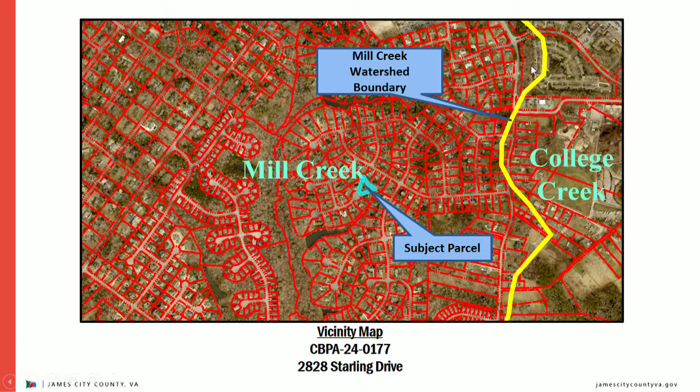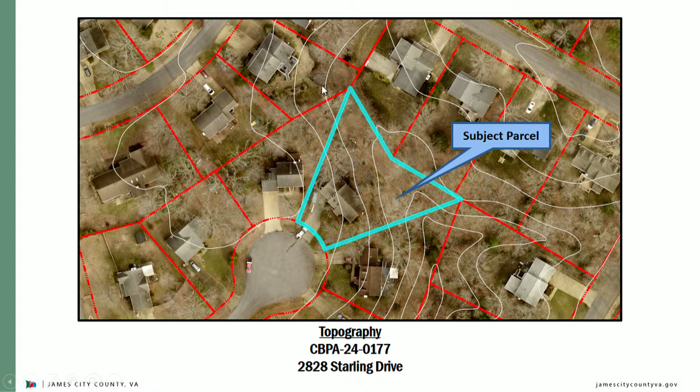Subject parcel and the Mill Creek watershed boundary. A closer look at the subject parcel and aerial view. Topography. RPA boundary.

The total lot size of this property is 0.41 acres, of which 44% is located within the RPA. The applicants are proposing to replace, expand, and convert the existing deck at the rear of the home to a screen porch. Total impacts to the RPA associated with this proposal equate to 128 square feet of increased impervious.

Required mitigation for this amount of impervious impacts equals half a planting unit. The applicants have provided a mitigation plan equaling half a planting unit, 1 understory tree, and 6 shrubs, therefore satisfying county mitigation requirements.

So in this section, you can see the existing deck, and they are expanding it here. And this is the section that is impacting the RPA. And then they will be converting it to a screen porch. And then these are the proposed mitigation plantings.

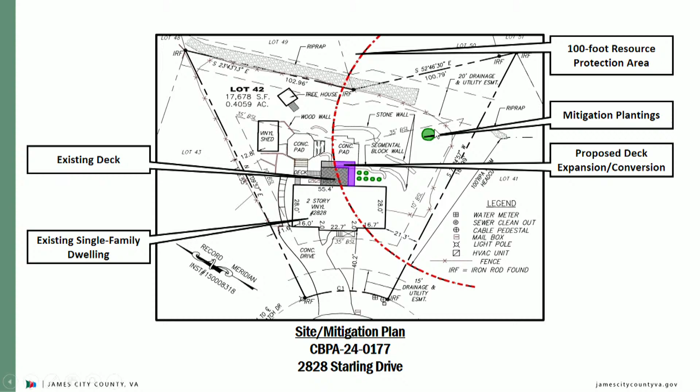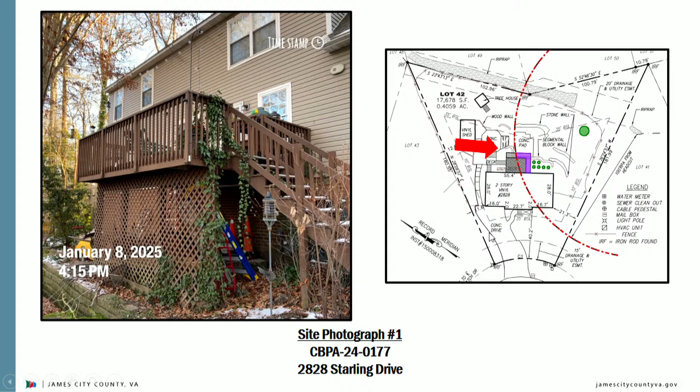This is a photo taken of the home showing the existing deck from this angle, side, and they'll just be facing it, expanding it this direction and around the side.

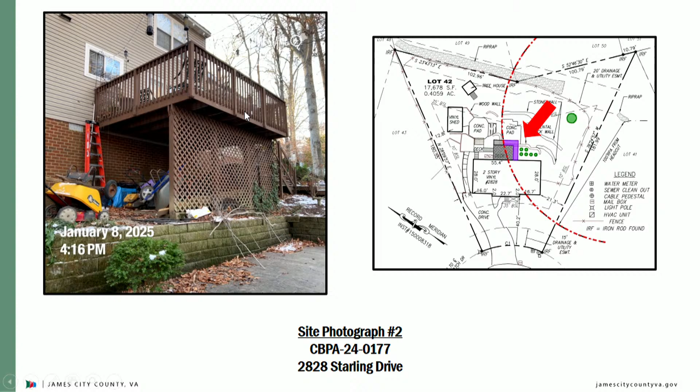Staff has evaluated the application and exception request for the deck replacement and conversion. This application meets the ordinance conditions in sections 23-11 and 23-14 and should be heard by the board because the construction of a deck is accessory in nature. The board may grant exceptions to sections 23-7 if the application meets the following 5 conditions which you have before you.

Staff has reviewed the application and exception request and has determined the impacts associated with the proposal to be minor for the proposed development. Staff recommends approval for this exception request, and if the board wishes to approve the request, staff recommends the following conditions to be incorporated into the approval.

The applicants must obtain all other necessary federal, state, and local permits as required for the project. The applicants must submit a surety of $500 in a form acceptable to the James City County Attorney's Office to guarantee the mitigation plantings equaling half a planting unit, 1 understory tree, and 6 shrubs.

This exception request approval will become null and void if construction has not begun by January 9th, 2026. Written requests for an extension to an exception must be submitted to the Stormwater and Resource Protection Division no later than November 26, 2025, 6 weeks prior to the expiration date. I'd be happy to take any questions at this time.

Does the expansion extend up to the retaining wall, or does it go past it? Supported by the concrete pad past it? I'll defer that question to the applicant.

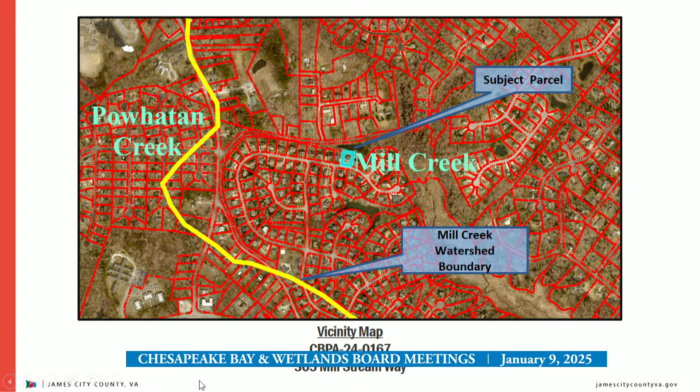Vice Chair Bowie, members of the board, Emily Grosjean, Watershed Planner, presenting CBPA 24-0167. Mr. Kenny Brown of Total Home Improvements Incorporated has applied for a Chesapeake Bay exception on behalf of Mr. Gerald P. Prosek for encroachments into the RPA buffer for the expansion of a deck located at 305 Mill Stream Way within the Settlers Mill subdivision and the Mill Creek watershed. You can see that watershed boundary outlined in yellow here and the parcel in question outlined in blue.

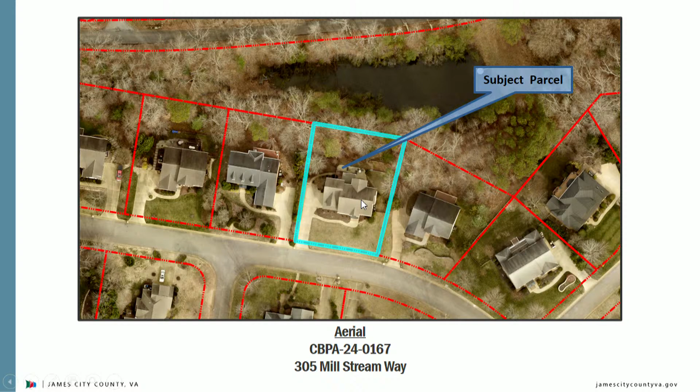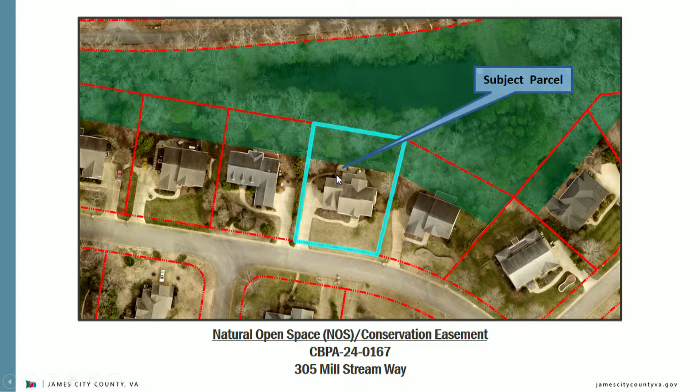The total lot size of this property is 0.38 acres, of which 53% is located within the RPA. The applicant is proposing to expand an existing deck by 96 square feet. Total impacts to the RPA associated with this proposal equate to 50 square feet of administrative impacts and 96 square feet of legislative impacts, for a total of 146 square feet of impacts within the RPA. Required mitigation for this amount of impervious impacts equals half a planting unit, or 6 shrubs. The applicant has submitted a mitigation plan equaling half a planting unit, or 6 shrubs, thus satisfying mitigation requirements.

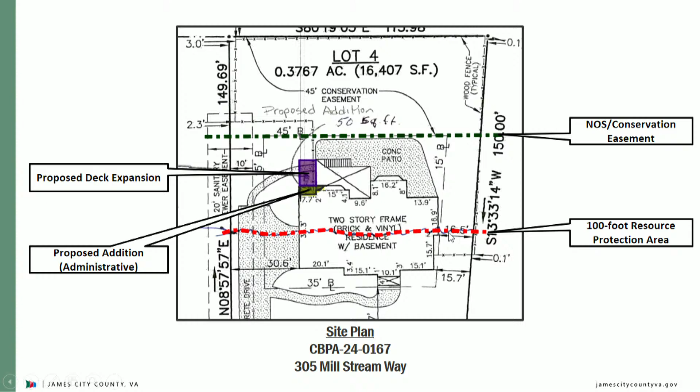As you can see here, grayed out is the administrative proposed addition, along with the proposed deck that's before you in purple. And then we have that 100-foot RPA buffer and that conservation easement. As you can see, it's completely within the landward 50. And then again, the same site plan, just with the addition of those 6 shrubs as required for mitigation.

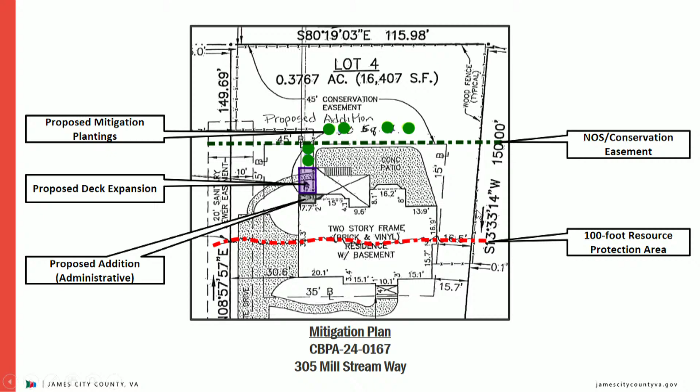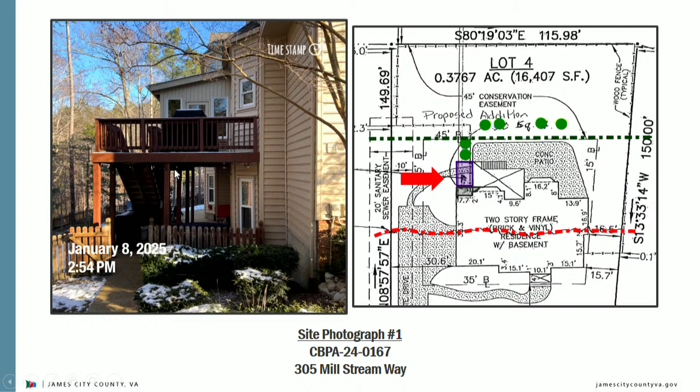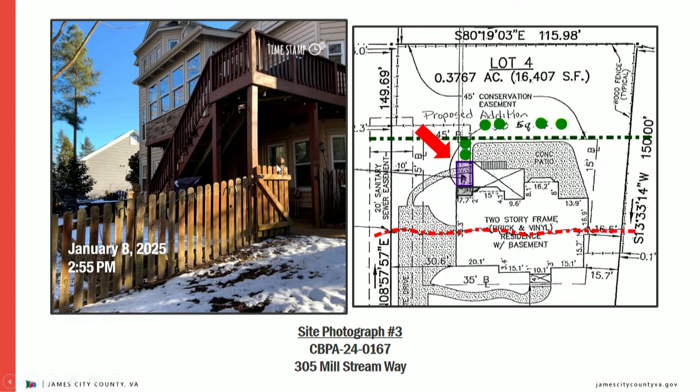Here are some recent photographs of the site, looking from the side where that existing deck is. The administratively approved addition will be coming out to this portion of the home, with that expansion of the deck coming out this way to connect with the existing one. That's another shot of that corner of the deck to show you where it's coming out in terms of the existing yard. And then more of an uphill shot, again showing that corner, showing how far out it's coming, and then a direct shot from uphill to show you this current slope.

Staff has evaluated the application and exception request for the expansion of a deck. This application meets the ordinance conditions in sections 23-11 and 23-14 and should be heard by the board because the expansion of a deck is considered accessory in nature. The board may grant exceptions to section 23-7 if the application meets the following 5 conditions outlined in front of you. Staff has reviewed the application and exception request and has determined the impacts associated with the proposal to be minor for the proposed development.

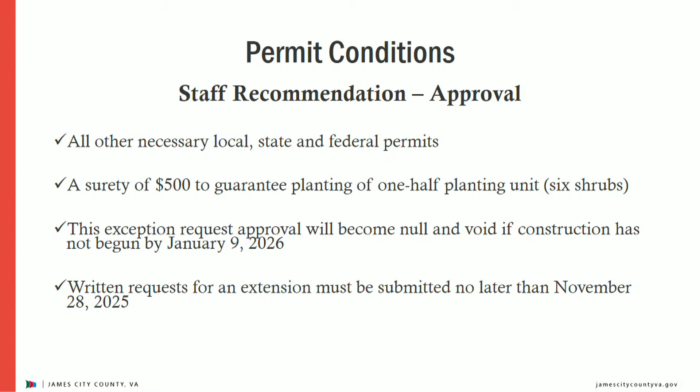Staff recommends approval for this exception request, and if the board wishes to approve the request, staff recommends the following conditions be incorporated into the approval. The applicant must obtain all other necessary federal, state, and local permits as required for the project, and the applicant must submit a surety of $500 in a form acceptable to the James City County Attorney's Office to guarantee the mitigation plan equaling half a planting unit or 6 shrubs. The exception request approval will become null and void if construction is not begun by January 9th of 2026, and written requests for an extension to an exception must be submitted to the SRP division no later than November 28th, 2025, which is 6 weeks prior to the expiration date.

If you have any questions, I'd be happy to take them at this time. Questions? No. Would anyone like to address the board?

Please state your name and address, sir. Mr. Chairman, members of the Chesapeake Bay Local Assistance Board, my name is Donald Davis. I'm a land surveyor at Davis and Associates. We're located at 3630 George Washington Memorial Highway in Yorktown. I'm here tonight representing Total Home Improvement, who filed the application to make this small addition to this deck, and I'm also here representing Mr. Jared Prosek, the owner of the property. The buffer restoration manual by the DCR in Richmond requires you to be able to compensate or mitigate for vegetation. The owner is requesting that and is approved to mitigate with 6 shrubs. They're in agreement with that. They're willing to provide the other requirements as far as surety for the site, and it's a very minor addition that we're making to this deck. We would ask you, since it's such a minor addition, that you approve the application.

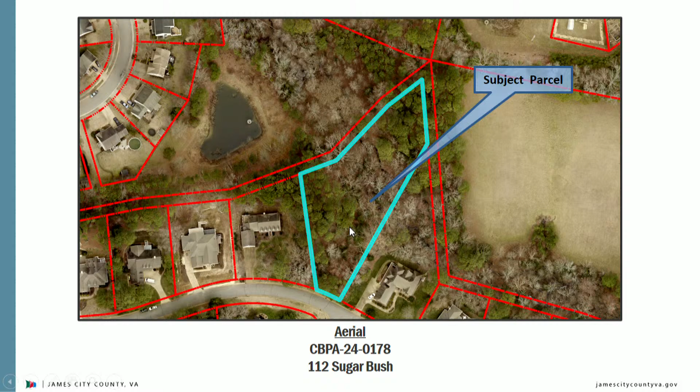The applicants have submitted a mitigation plan equaling 7 canopy trees, 13 understory trees, and 113 shrubs, thus satisfying the county's mitigation requirements for CBPA 23-0167 and this current proposal. Any mitigation surety as a condition of approval will only pertain to the additional half a planting unit, or 6 shrubs, that is required. Staff are also requesting that an affidavit be recorded in the Williamsburg, James City County Courthouse due to the environmental sensitivity of this lot.

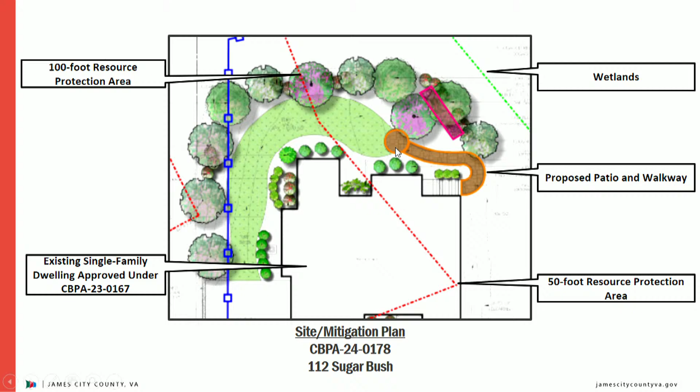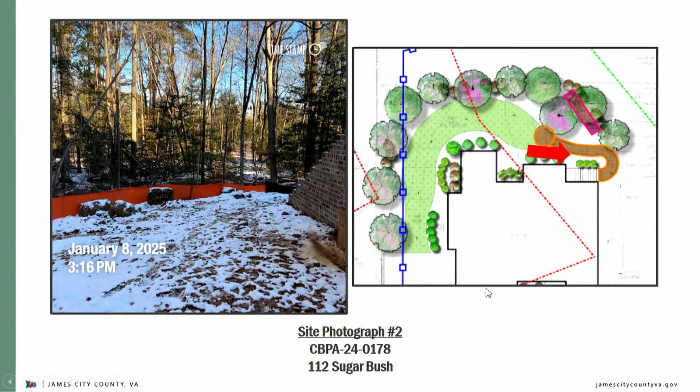Moving closer in, 2 of the BMPs remain the same as the previous proposal. And then again, we have that patio and walkway coming off the stairs. Looking at the existing site, that staircase in question is located here, so it'll start here and come out. Looking the other way, it'll be coming out this way, off that staircase, with the patio being right around this area.

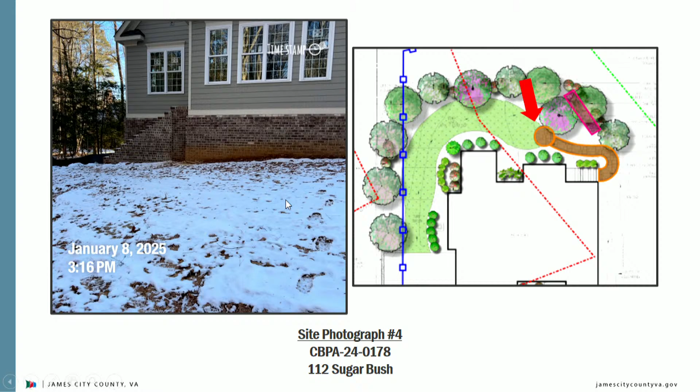Staff has evaluated the application and exception request for the installation of a patio and walkway. This application meets the ordinance conditions in sections 23-11 and 23-14 and should be heard by the board because the construction of a patio and walkway are considered accessory in nature. The board may grant exceptions to section 23-7 if the application meets the following 5 conditions outlined before you.

Staff has reviewed the application and exception request and has determined the impacts associated with the proposal to be minor for the proposed development. Staff recommends approval for this exception request, and if the board wishes to approve the request, staff recommends the following conditions be incorporated into the approval.

The applicant must obtain all other necessary federal, state, and local permits as required for the project, and must submit a surety of $500 in a form acceptable to the James City County Attorney's Office to guarantee the mitigation plan equaling half a planting unit, or 6 shrubs. An affidavit must be recorded in the Williamsburg, James City County Courthouse prior to the release of surety, and this exception request approval will become null and void if construction is not begun by January 9th of 2026. A written request for an extension must be submitted to the SRP division no later than November 28th, 2025, which is 6 weeks prior to the expiration date. If you have any questions, I'd be happy to take them at this time.

Mitigation of 6 shrubs is far exceeded by what they're proposing, which is a good thing, but what's the reason behind that? The current mitigation of 6 shrubs accounts specifically for the patio and walkway, but the plan brought to us also accounts for the previous mitigation requirements for the lot.

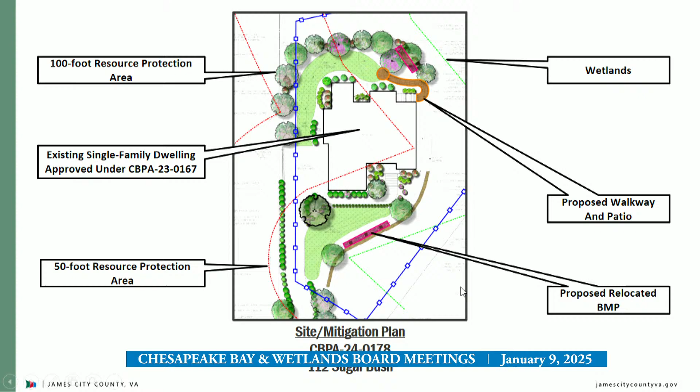Ms. Bowie, if staff could get clarification on the board's recommendation on this infiltration trench, which was originally here per the original approval that Mr. Detweiler was mentioning via Ms. Grogine, and it has been shifted here. Just wanted to point out, that is his objection: his feeling is this location will put more water on his property, which is down here on the screen. Just want to make sure that the location of that infiltration trench is addressed by the board at this meeting, whether it should be the original approved location or the modified, revised location.

I have a question: so that trench is moved uphill, right, along the berm? What about where's that water going? That was going to be handled by that infiltration trench, although some of it's being intercepted by the new location, but there's still water that's going to discharge that way.

Mr. McElroy: the original design as shown on the screen, the water was collected in this swale system and delivered to the infiltration here, and then discharged through the rear of the property, not affecting Mr. Detweiler's property. The revised location just shows a location, it doesn't show revised grading.

If the grading's the same, then the location of the infiltration trench would be here within the swale system itself, still treating this part of the project, but not treating any of this other water, which was a concern raised at the time.

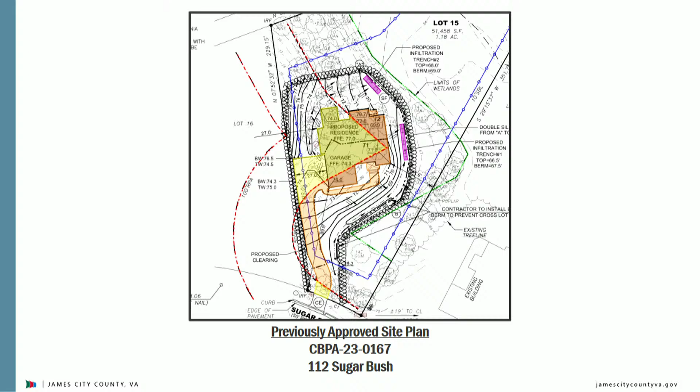And so moving the structure further towards the front of the house is the proposal, but in lieu of, or replacing the one that's there, what would be -- why not two? Why not leave one and add one? A total of three. Was that considered?

That's a question you need to ask the applicant. Staff's unprepared to answer that question. Also under consideration is increasing the size of this one to accommodate the additional impervious cover. Just want to make sure that was clear in the resolution.

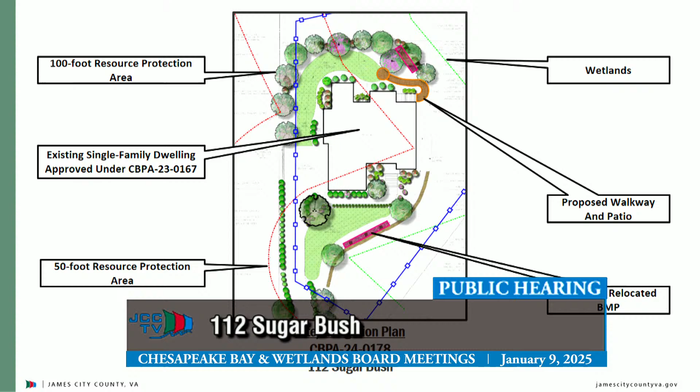You get a comment on whether there was consideration for just adding one as opposed to moving one? You come forward, please.

To be honest, I wasn't in that process, so I don't know what considerations were taken. I'm filling in for someone that couldn't make it, so I'm getting secondhand information. I don't want to mislead or say anything wrong.

What you're doing is increasing the BMP pond area to hold more water, and it'll filter out to the same ditch to the rear, to the right side, the rear property. You're maintaining everything except enlarging the BMP to accept more water so it doesn't run over on the next door neighbor until it has a chance to run off. Is that correct? From what I understand, that's the goal, is to prevent the water from doing that.

I'm not 100% sure why they moved it. I can't fully answer that question.

Is there an option, if you were to leave the original proposal there and that infiltration trench number 2, the smaller one, if you were to increase the size of that for the patio, would that be a viable option to go with the original plan but just bump the size up of trench number 2? Would that mitigate the concerns of the neighbor as far as flow?

Are you aware of the adjacent property owner's concerns? I was not, and I don't think that was brought to my attention before our meeting.

Would you consider a deferral on this to modify your plan, based on the concerns of the board or whatever?

I guess I was told to come and answer the questions for the patio. I don't know about the BMP stuff, so the paver patio and walkway, I thought that's what we were looking for. But as far as the BMPs, we're going to be working with Chase from Land Tech to make sure we accommodate the BMP size and make sure there aren't any future issues with water going into adjacent properties.

All right, thank you very much. So it appears the board has some reservations about the information we have at this point in order to make a decision. Are you able to answer the question about the height of the berm? Ms. Gruging, you don't have that available? All right, thank you.

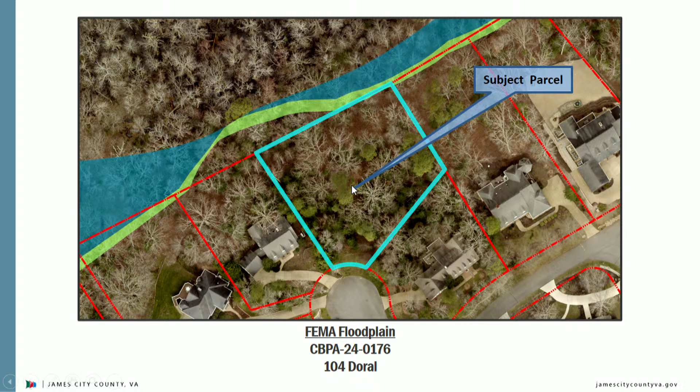The applicant is proposing the construction of a deck and patio in the rear of the proposed single-family dwelling. Total impacts to the RPA associated with this proposal equate to 2,339 square feet of administrative impacts to the landward 50-foot RPA buffer, 304 square feet of legislative impacts to the landward 50-foot RPA buffer, with 2,643 square feet total impacts to the RPA buffer.

The minimum first floor square footage required for a two-story in this section of Ford's Colony is 1,100 square feet. Required mitigation for this amount of impervious impacts equals 6.5 planting units, or 6 canopy trees, 12 understory trees, and 24 shrubs. The applicant has provided a mitigation plan equaling 6.5 planting units in the form of 3 canopy trees, 4 understory trees, and 52 shrubs, thus satisfying county mitigation requirements.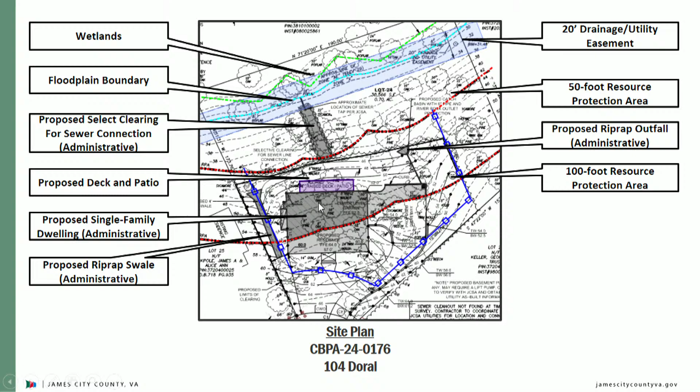As you can see, the proposed deck and patio is staying within that 50-foot landward RPA buffer. And then the same thing again, a little bit clearer, but with the addition of the proposed mitigation plantings outlined in green here.

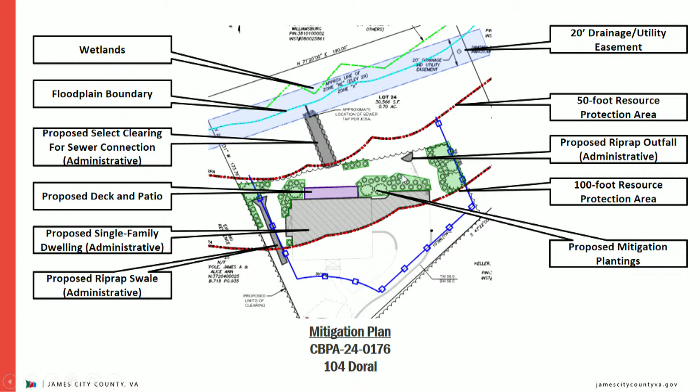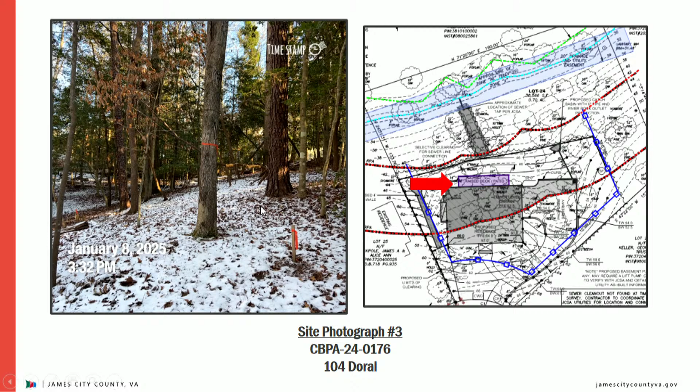Some recent photography of the site, going off this little stake here as the corner of the proposed administrative single-family dwelling. Moving to the right to give you an idea of where that proposed deck and patio will be located, and then moving to the side more to give you an idea of the topography. Here's a shot looking back up to the front of the property.

Staff has evaluated the application and exception request for the construction of a deck and patio. This application meets the ordinance conditions in sections 23-11 and 23-14 and should be heard by the board because construction of a deck and patio are considered accessory in nature. The board may grant exceptions to section 23-7 if the application meets the following 5 conditions outlined before you.

Staff has reviewed the application and exception request and has determined the impacts associated with the proposal to be minor for the proposed development. Staff recommends approval for this exception request, and if the board wishes to approve the request, staff recommends the following conditions be incorporated into the approval.

The applicant must obtain all other necessary federal, state, and local permits as required for the project. The applicant must submit a surety of $4,500 in a form acceptable to the James City County Attorney's Office to guarantee the mitigation plan equaling 6 planting units or 3 canopy trees, 4 understory trees, and 52 shrubs.

This exception request approval will become null and void if construction is not begun by January 9th, 2026, and a written request for an extension to an exception must be submitted to the SRP division no later than November 28th, 2025, which is 6 weeks prior to the expiration date. If you have any questions, I'd be happy to take them at this time.

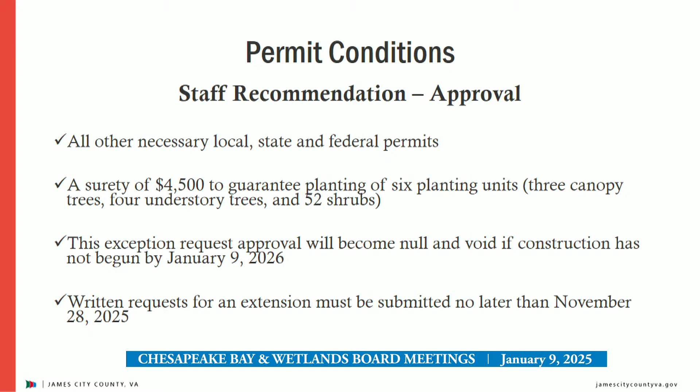Just to be clear, the single-family dwelling is administratively approved. Yes, sir, that's correct. And so all we're looking to approve is the addition of the deck. Yes, sir, deck and patio.

Made a comment earlier about the minimum square footage being 1,100 square feet for a single. What was the rationale behind even mentioning that? What does that mean? What does that have to do with the deck?

Just to try to keep some consistency across staff reports that pertain to homes in Ford's Colony, we want to make sure we're just including that for record's sake. But you've already administratively approved this single-family dwelling though, right? Correct. Okay.

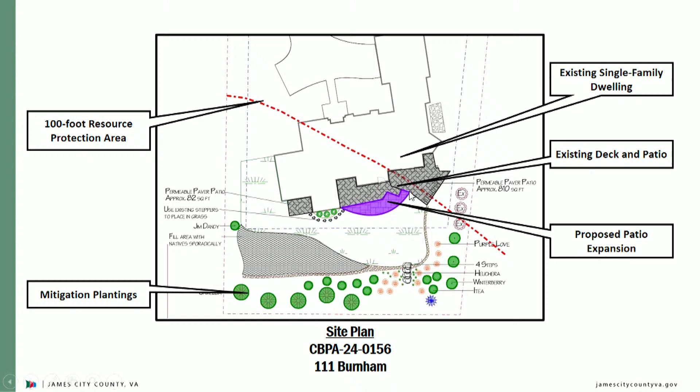The areas grayed out and hatched are the existing impervious structures on the property. This purple area here is going to be the expansion. This section here is actually covered by the existing deck, and they are expanding the patio beneath this existing impervious. The increased area is going to be roughly in this area here that is currently mulched, and then it comes down a little bit beside the existing deck.

As you can see here in green are the proposed mitigation plantings.

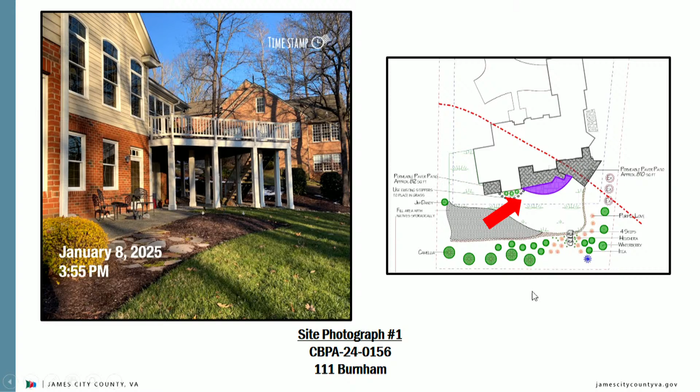Photo from this angle showing the work area, and another from this side. Again, it will be coming further down this direction and then expanding out into this mulched area.

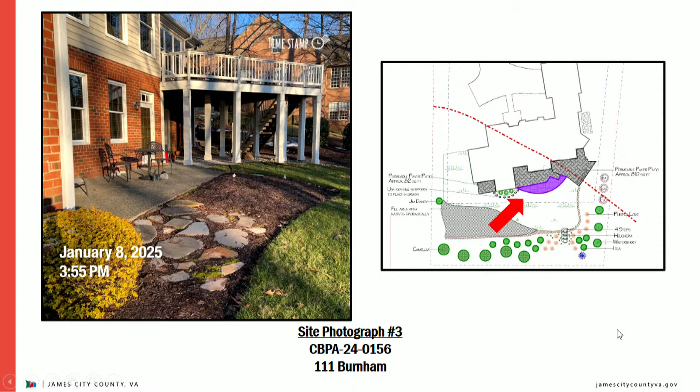Staff has evaluated the application and exception request for the patio replacement and expansion. This application meets the ordinance conditions in sections 23-11 and 23-14 and should be heard by the board because the construction of a patio is accessory in nature. The board may grant exceptions to section 23-7 if the application meets the following 5 conditions, which you have before you.

Staff has reviewed the application and exception request and has determined the impacts associated with the proposal to be minor for the proposed development. Staff recommends approval for this exception request, and if the board wishes to approve the request, staff recommends the following conditions be incorporated into the approval.

The applicants must obtain all necessary federal, state, and local permits as required for the project. The applicants must submit a surety of $1,500 in a form acceptable to the James City County Attorney's Office to guarantee the mitigation plantings equaling 18 shrubs. This exception request approval will become null and void if construction has not begun by January 9th, 2026, and written requests for an extension to an exception must be submitted to the Stormwater and Resource Protection Division no later than November 28th, 2025, 6 weeks prior to the expiration date.

I'd be happy to take any questions at this time. Questions for Ms. Frazier?

Like everything normal on this, pretty straightforward, though. The site plan shows the existing deck to be permeable. Is that an error? That's why I tried to gray it out a little bit to show that it was already there, existing, yeah.

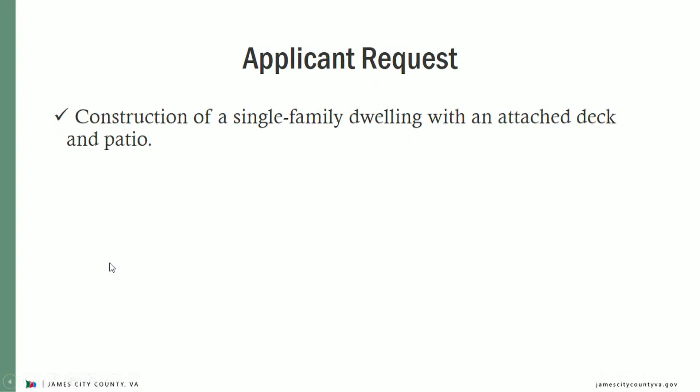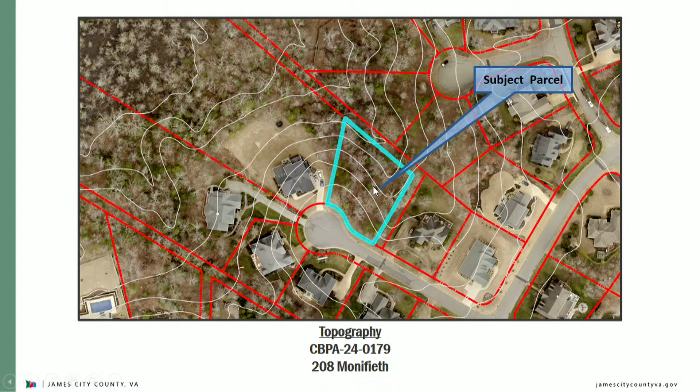Moving further in on that parcel, the most recent aerial photography, along with the existing topography and RPA buffer. The parcel was platted in 2001 prior to changes to the Chesapeake Bay Preservation Ordinance in 2004. The total lot size of this property is 0.51 acres, of which 95% is located within the RPA. The applicant is proposing the construction of a single-family dwelling with an attached deck and patio.

A previous Ches Bay exception request under CBPA 21-0047 was approved on April 14th, 2021. This approval has since expired and is being brought before the board again.

Total impacts to the RPA associated with this proposal equate to 3,224 square feet within the 50-foot landward RPA, and 1,009 square feet within the seaward 50-foot RPA, for a total of 4,233 square feet of impacts to the RPA buffer overall. Required mitigation for this amount of impervious impacts equals 10.5 planting units, or 10 canopy trees, 20 understory trees, and 36 shrubs. The applicant has provided a mitigation plan equaling 12 planting units, or 4 canopy trees, 6 understory trees, and 104 shrubs, thus exceeding the county's mitigation requirements.

Additionally, the applicant is proposing 2 bioretention stormwater best management practices, or BMPs, to manage drainage on the lot. Prior to the issuance of a final certificate of occupancy, the applicant must submit a letter of installation from a qualified professional to the SRP division. No surveyed as-built drawings are required, but this letter must verify compliance with all approved construction plans for stormwater BMP facilities. Staff are requesting that an affidavit be recorded in the Williamsburg-James City County Courthouse due to the environmental sensitivity of the lot.

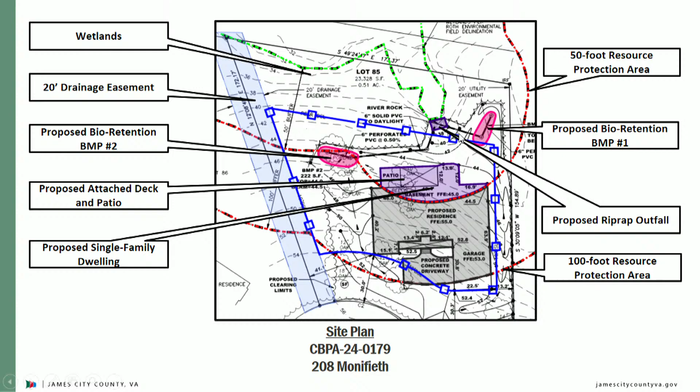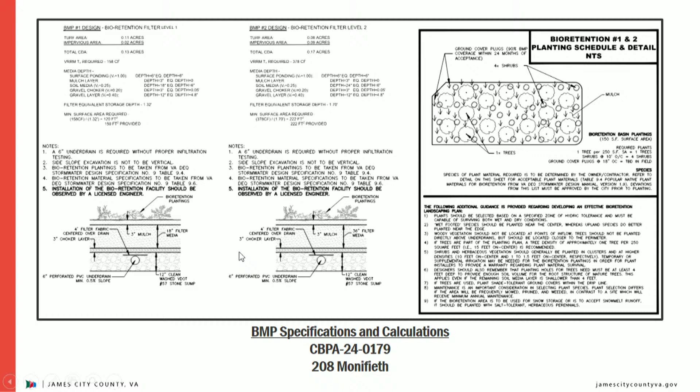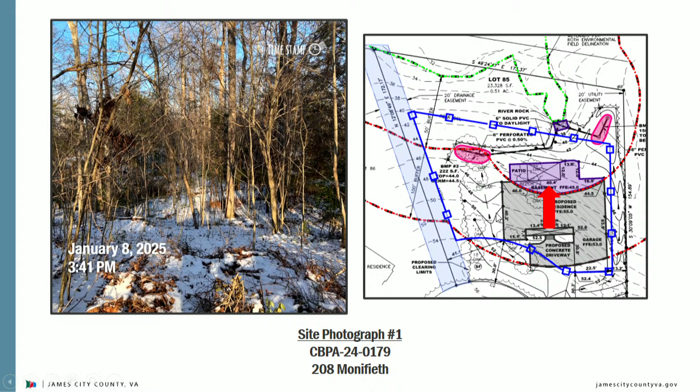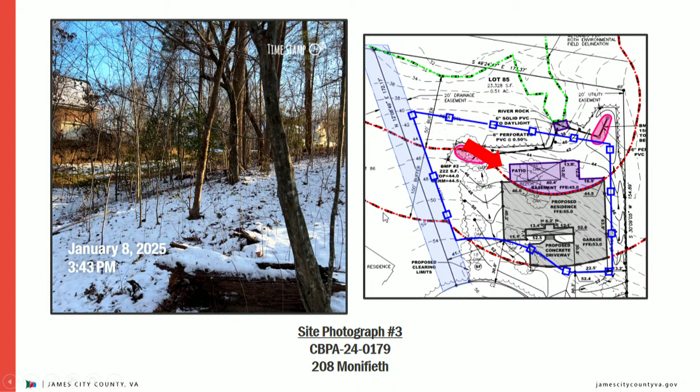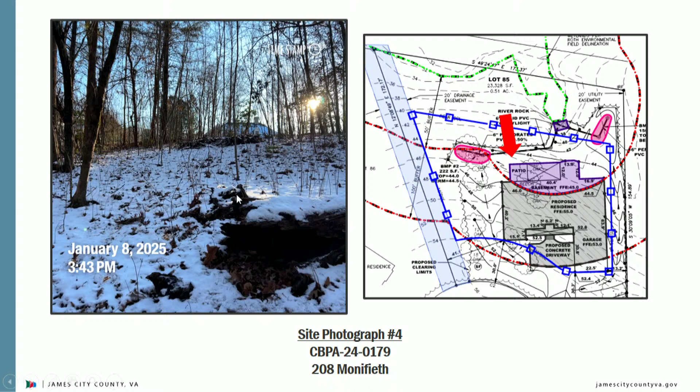And some recent photography of the site. You can faintly make out a blue flag back here. I'm going off that point with these photos to show the approximate location of where that proposed deck and patio and portion of the single-family home will be located. Looking from the side there, where that blue flag was further back in the previous photo, coming from the side to show you where everything will be going. And then just turning to the right from there, looking more uphill at where that patio corner will be. And then a shot looking uphill, just to give you an idea of the existing topography on the site from that location.

Staff has evaluated the application and exception request for the construction of a single-family dwelling, deck, and patio. This application meets the ordinance conditions in sections 23-11 and 23-14 and should be heard by the board because the construction of a deck and patio are considered accessory in nature, and the proposed single-family dwelling extends into the seaward 50-foot RPA. The board may grant exceptions to sections 23-7 if the application meets the following 5 conditions outlined before you. Staff has reviewed the application and exception request and has determined the impacts associated with the proposal to be minor for the proposed development.

Staff recommends approval for this exception request, and if the board wishes to approve the request, staff recommends the following conditions be incorporated into the approval. The applicant must obtain all other necessary federal, state, and local permits as required for the project, and the applicant must submit a surety of $6,000 in a form acceptable to the James City County Attorney's Office to guarantee the mitigation plan equaling 12 planting units, or 4 canopy trees, 6 understory trees, and 104 shrubs, and the construction of 2 bioretention stormwater BMP facilities.

An affidavit must be recorded in the Williamsburg-James City County Courthouse prior to the issuance of a building permit, and the applicant must submit a letter of installation from a qualified professional to the SRP division prior to the issuance of a final certificate of occupancy. This letter must verify compliance with all approved construction plans for stormwater BMP facilities. No surveyed as-built drawings are required, and this exception request approval will become null and void if construction has not begun by January 9th of 2026. Written requests for an extension must be submitted to the SRP division no later than November 28th of 2025, which is 6 weeks prior to the expiration date. If you have any questions, I'd be happy to take them at this time.

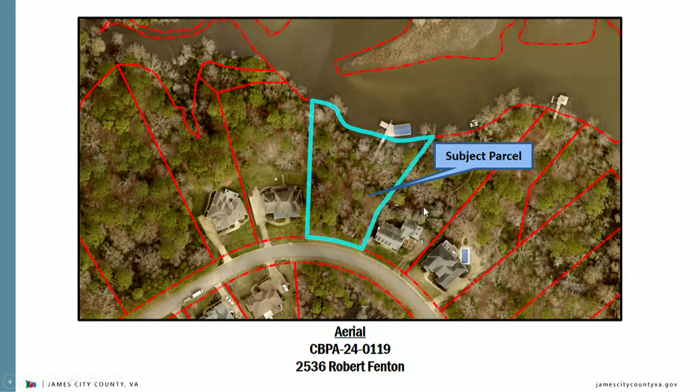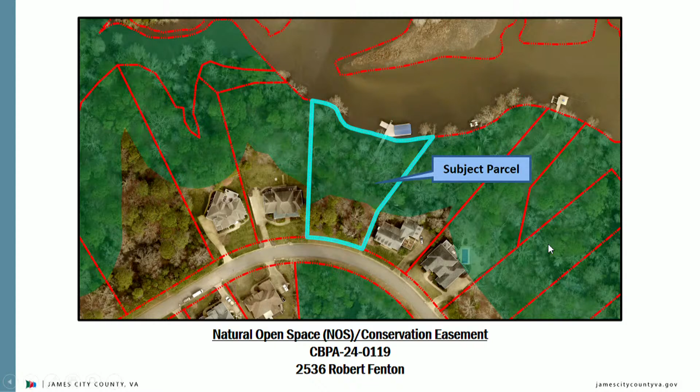Topography, RPA, natural open space easement, floodplain.

The total lot size of this property is 0.93 acres, of which 72% is located within the RPA. A previous Chesapeake Bay exception request was administratively approved under CBPA 24-0137 for the installation of an access path and sightline.

In November 2024, Stormwater and Resource Protection Division staff received an inquiry about the installation of a patio on this property without the submission of a Chesapeake Bay preservation exception request. The applicants are seeking an after-the-fact approval for the installation of a patio and walkway.

Total impacts to the RPA associated with this proposal equate to 288 square feet of new impervious to the landward 50 RPA. Due to this being an after-the-fact request, the mitigation is doubled. Thus, the required mitigation for this amount of impervious impacts equals 1.5 planting units. The applicants have provided mitigation equaling 1.5 planting units: 1 canopy tree, 3 understory trees, and 6 shrubs, therefore meeting county mitigation requirements.

As you can see here, this is the access path that was administratively approved. Here's the RPA buffer, mitigation plantings in green, and this area here is the proposed patio and walkway. The section in purple would be within the RPA, and they're also proposing some stepping stones connecting the walkway to the access path.

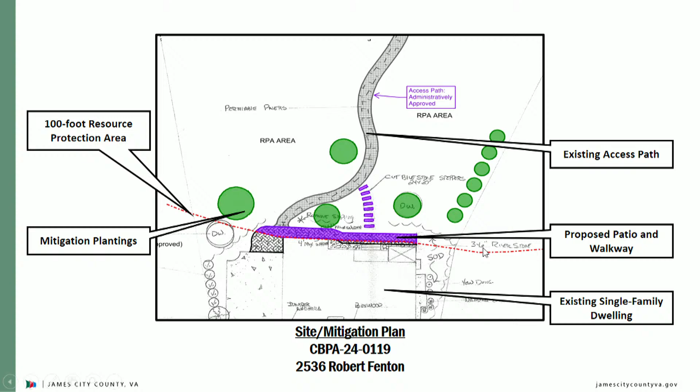Here's some site photos taken. This is the walkway that was constructed without prior approval. And the patio will be going about here, and the RPA line runs roughly on this section of the patio.

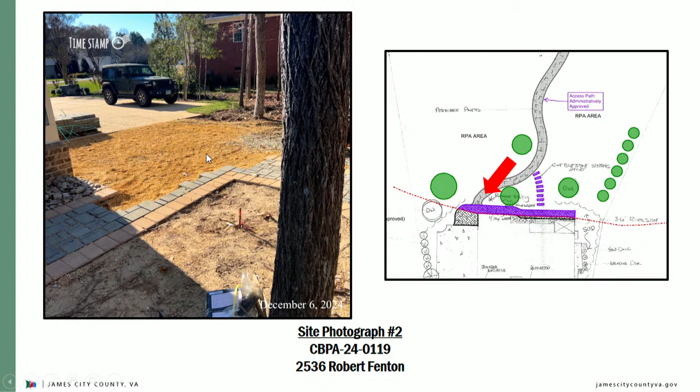Staff has evaluated the application and exception request for the installation of a patio and walkway. This application meets the ordinance conditions in sections 23-11 and 23-14 and should be heard by the board because the installation of a patio and walkway is considered accessory in nature. The board may grant exceptions to section 23-7 if the application meets the following 5 conditions, which you have before you.

Staff has reviewed the application and exception request and has determined the impacts associated with the proposal to be minor for the proposed development. If the board wishes to approve the request, staff recommends the following conditions be incorporated into the approval: the applicants must obtain all other necessary federal, state, and local permits as required for the project, and must submit a surety of $1,500 in a form acceptable to the James City County Attorney's Office to guarantee the mitigation plantings equaling 1 canopy tree, 3 understory trees, and 6 shrubs.

This exception request approval will become null and void if construction has not begun by January 9th, 2026, and written requests for an extension for an exception request must be submitted to the Stormwater Resource Protection Division no later than November 28th, 2025, 6 weeks prior to the expiration date. I'd be happy to take any questions at this time.

Picture back up the work that's being done there. In other words, this was not approved, what I see there now? Correct. And you're trying to get this approved after the fact? Correct. I understand. Okay.

Ms. Frazier, I have a question. On the site plan or site mitigation plan, not the photograph, there's a circle that says remove something, and I can't read that second word. So this site plan has been modified. They had submitted a site plan requesting to remove that sapling prior. It says sapling. Yes, okay. I do believe that is this tree right here, which is still standing. I would defer that to the applicant if that is different. But yeah, if you have any more questions.

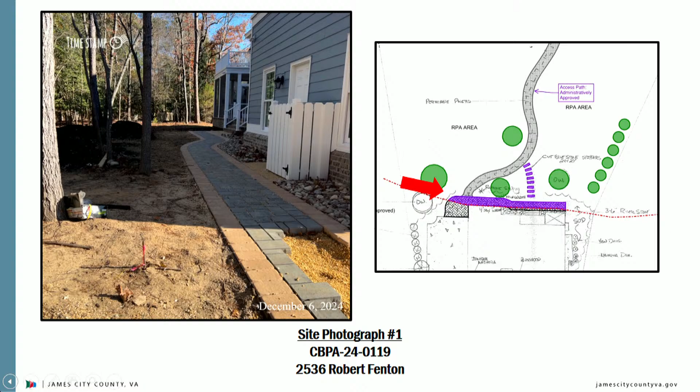Okay, all right, thank you. That clarifies. Any further questions? Thank you, Ms. Frazier. If you care to address the board, please come forward.

Hi, I am Bruce Bailey, property owner. In answer to your question about why the work started before it was approved, you moved the line on me.

I had Land Tech do a site plan. As you can see, the house is there. I submitted for the access path and a sight line. I don't know if you can see it in this picture, but the sign that the county drove into the ground to represent the line — my path there is outside of it.

So I did not for a minute think that my path was inside this sight line or inside the RPA. Anyway, somebody scaled the plat when a question was asked by a neighbor, and someone said it didn't scale correctly. So I had to pay to have someone come and redelineate the wetlands. They measured it off and determined that my patio was over the line. So I had no intent to do this without proper approval.